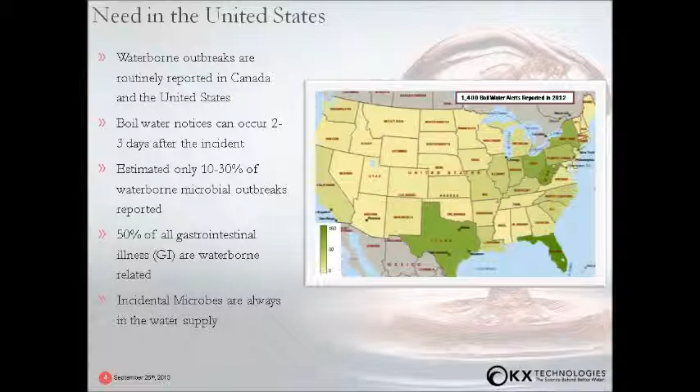The Water Quality Association, which is a standards and third-party testing organization in the United States, suggests a final barrier approach. They envision water being treated at a central location for an area and then treated again close to the point of consumption. They estimate approximately only 1% of the water going into a home is actually used for consumption.

So let's talk about what waterborne disease is. The truth is, there are many different waterborne diseases, but they're all caused by either bacteria, virus, or protozoa in the water. And you might ask, well, if we know what the problems are, why is it so hard to fix this? And there's a lot of reasons, but size plays a big part of it. Bacteria are typically 1 to 3 microns. Viruses are typically less than 0.05 microns, and cysts are typically between 3 and 10 microns.

To put this into perspective, if you were to take a typical filter that you can buy at Lowe's or Home Depot, which has about an outside diameter of 2.5 inches and length of about 10 inches, if you were to take that filter and scale it up to be the size of the Empire State Building, at this size, a cyst would be about the size of a child's rubber ball. Bacteria would be about the size of a pencil eraser, and virus would be smaller than the tip of the pencil. These are very, very small.

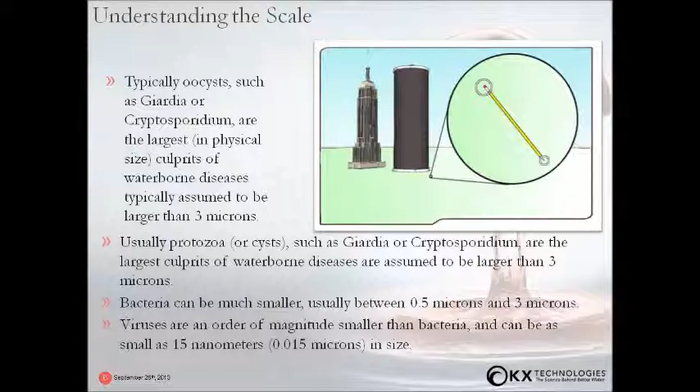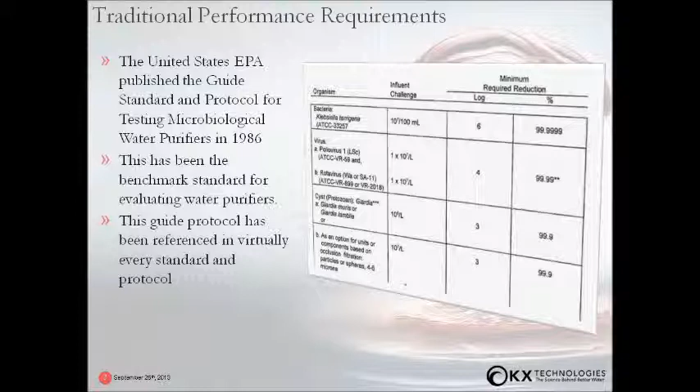Another reason why waterborne disease is a difficult problem to fix is the performance requirements. In 1986, the US EPA established a basic standard to evaluate filtration technologies. They set the standard as 6 log reduction for bacteria, 4 log reduction for virus, and 3 log reduction for cyst. This standard has been the basis for most of the evaluation protocols throughout the world.

Again, to put this into perspective, a typical challenge solution for testing a purification technology will have greater than 1 million bacteria per 100 mils of challenge water. 100 milliliters is approximately about half a cup of water. This is equivalent to filtering the entire population of Manhattan out of every 100 mils of water. And by this protocol, if more than one person was to get through, the system would be considered a failure.

For virus, a typical challenge water will have more than 10,000 viruses per mil of challenge solution. This is equivalent to about the undergraduate student population at University of Pittsburgh, which is not too far from here, in every drop of water. And by this protocol, if more than one student were to get through, the system would be considered a failure.

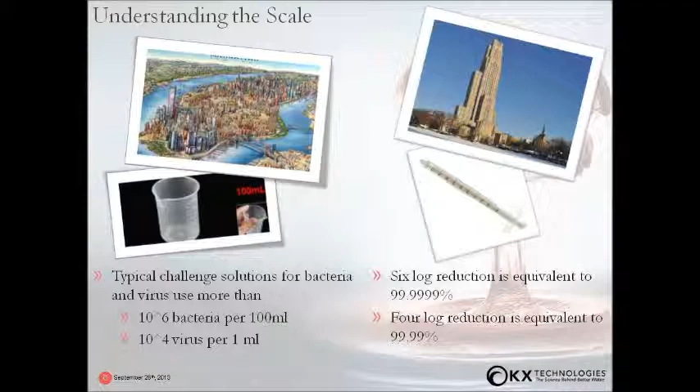Some certification and governmental organizations are recognizing that reducing levels lower than that dictated by the US EPA guidelines can still make a difference in the overall impact of waterborne disease in society. The WHO released a tiered approach to evaluating filtration systems, splitting them into interim, protective, and highly protective categories.

This is the theory behind the change in policy from the WHO. DALY stands for Disability Adjusted Life Year and is a measurement of the overall disease burden. Mexico and Brazil also have their own standards which allow less stringent evaluations for filtration products. Basically, they're recognizing that less stringent requirements can still have a profound effect on the total disease burden of a country.

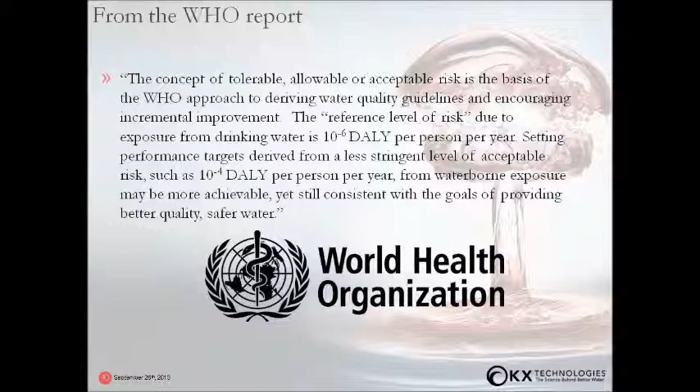So how can we address this need? KX Technologies has been dedicated to developing products that address this global need for over 10 years. We have been developing technologies and products that are targeted towards removing bacteria, virus, and protozoa from water. And one of the most elegant technologies we've come up with is a method to treat carbon that can be used in a variety of systems to target this goal.

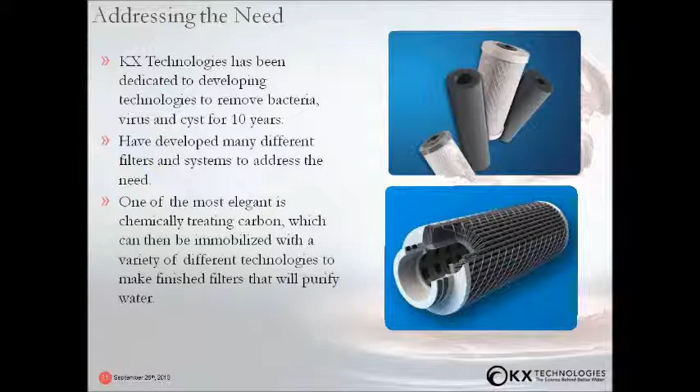It is important to note here the difference between disinfection and filtration. There are many technologies out there that rely on disinfection and dose in chemicals such as bromine or chlorine into the water in order to kill the microorganisms, but you end up drinking the dead organisms. These technologies have their use, but we've been targeting filtration technologies, which give a greater level of protection because they actually physically remove these organisms from the water.

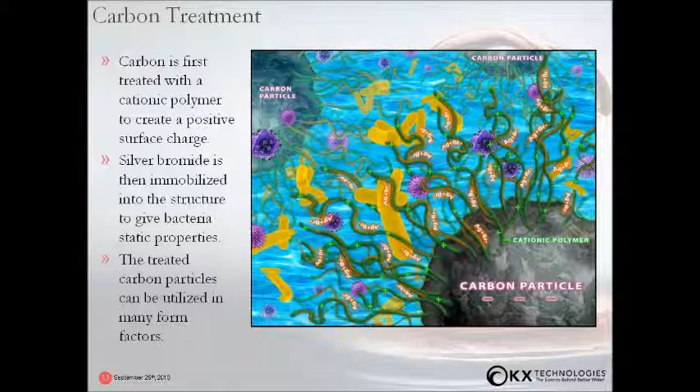So how do we do it? We start off treating the carbon with a cationic polymer. We then add a metal halide such as silver bromide to the surface of the cationic polymer. When in water, this complex extends out from the carbon surface and can electrostatically remove pathogens. We can take this carbon powder and produce carbon blocks or integrated papers to produce finished filters. Typically, we try to target filter pore sizes that will remove the bacteria and protozoa by size exclusion. The virus is then removed by electrostatic attraction.

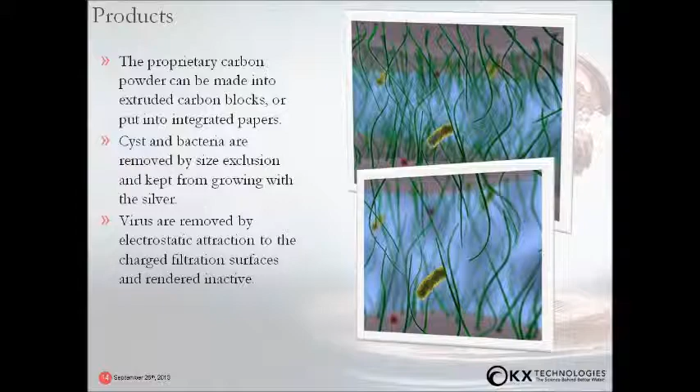This picture gives a quick comparison to other technologies that are available. Those particles in the water, such as virus, that are between 0.01 micron and approximately 0.1 micron, can be removed electrostatically. Those larger than that will typically be removed by size exclusion.

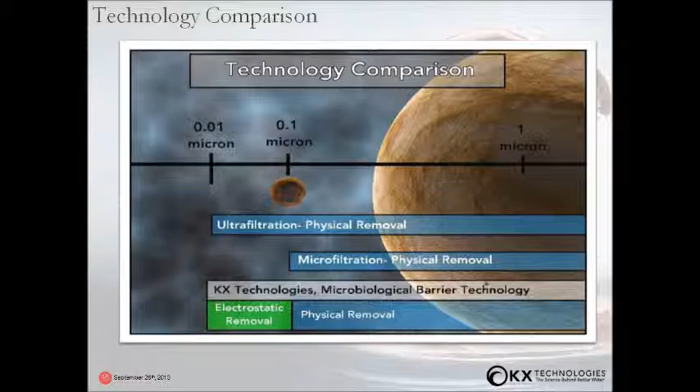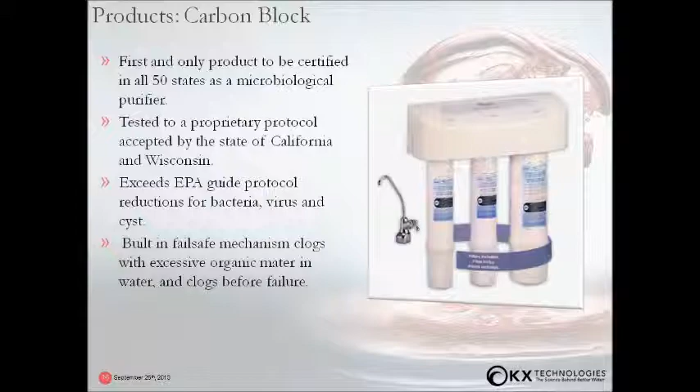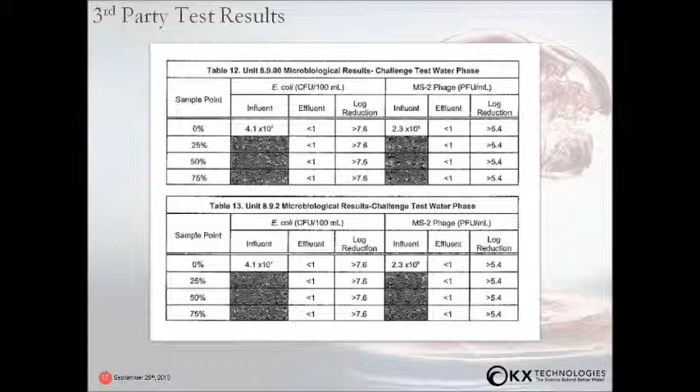A few examples of products. This is a product that KX Technologies produces that is sold in the United States via retail channels. This carbon block style filter is the first and only product to be certified in all 50 states as a microbiological purifier. These show some typical third-party test results. You can see that the influents are an order of magnitude higher than the minimum standards, and the filter showed no bacteria or virus in the effluent throughout the entire life of testing.

Another style of product utilizing the treated carbon that we've been developing is an integrated paper, targeted more towards third world areas and areas that don't have high water pressure. This paper utilizes very small particles of carbon and will flow under very low pressure or even gravity conditions. We have several products being sold into Mexico and Brazil for low pressure but plumbed systems.

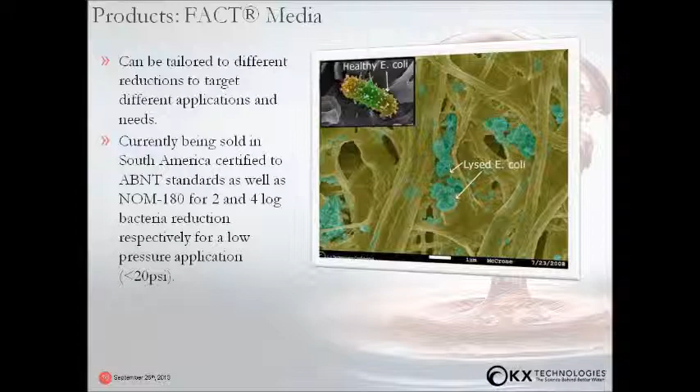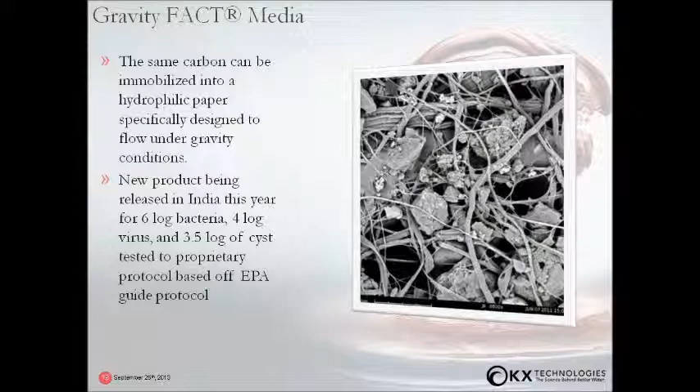It is also worth noting here that another problem with delivering filtration technologies to the developing world is that most of the areas that desperately need these technologies don't have a lot of water pressure, if any at all. I described the size of the contaminants as well as the challenge loads, but to give you an idea on the challenge of pressure, if you were to take a number 2 pencil and rest it with the eraser in your palm, your hand is feeling more pressure than this filter sees to remove all those small contaminants at those high levels.

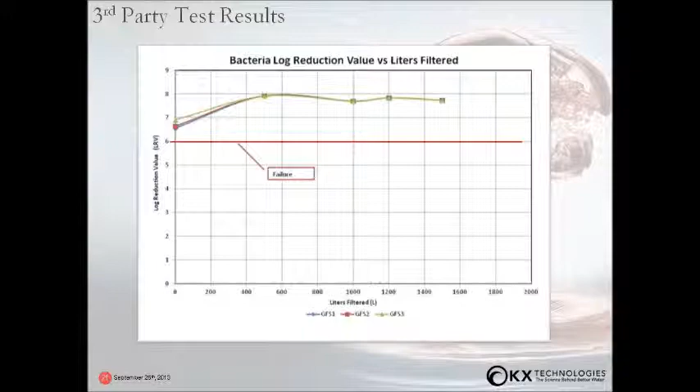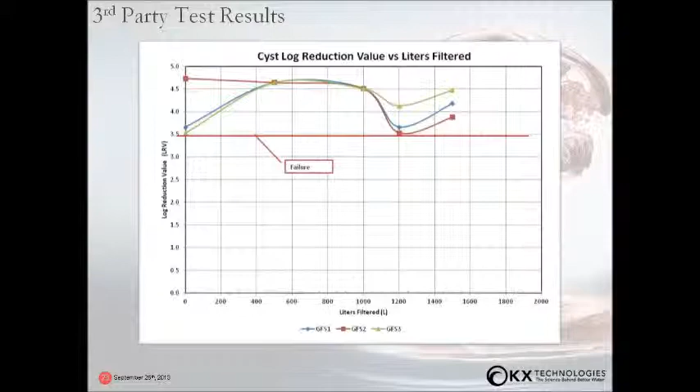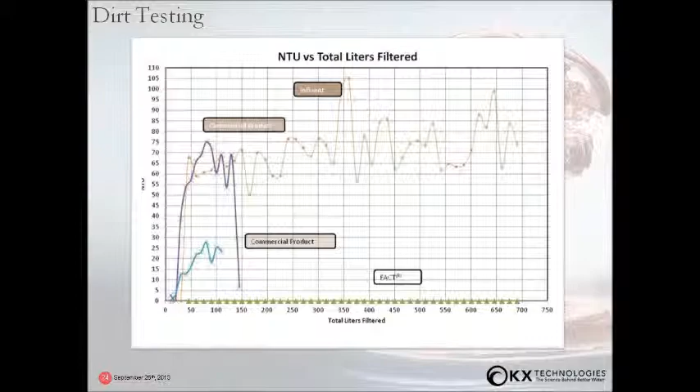And this shows the total volume of water that a single filter can produce. One small filter, about the size of a softball, can produce 1,500 liters, which is about 77 5-gallon buckets of clean, safe drinking water.

So in conclusion, chemical treatment of carbon is an excellent way to enhance filtration technologies, and it can be applied in many different types of filters. It has a great potential to make the problem of waterborne disease a thing of the past.